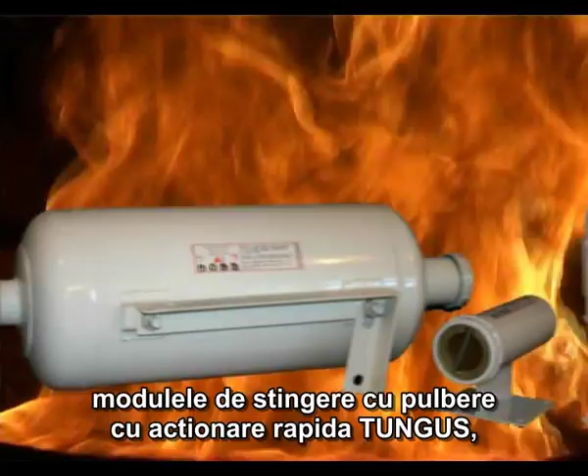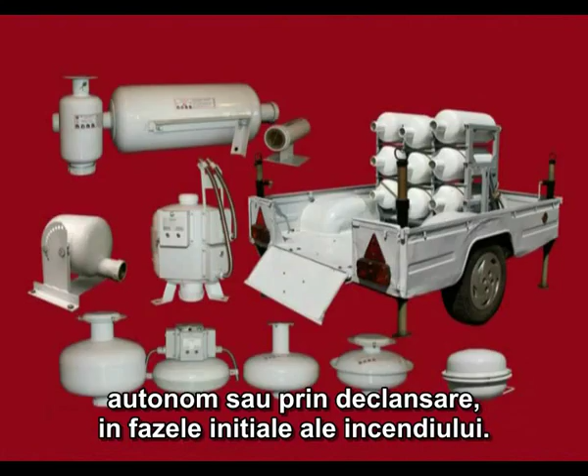To this effect, Источник Plus, closed joint stock company, has designed and developed the serial production on base of defense industry achievements of reasonably priced, efficient, fast-acting powder fire extinguishing modules Tungus, which provide fire extinguishing of the seats of fire arising in automatic, autonomous or self-triggering mode in early stage of fire origin. Such solution makes it possible to avoid large fire damage at minimal costs for modules installation.

The modules Tungus have been highly appraised by the heads of the Ministry for Emergency Situations, Russia, the chiefs of firefighting services in Mongolia, India, China, Italy, CIS countries during demonstration firefighting testings in these countries with Tungus modules usage, the heads of regional branch ministries and industrial enterprises, and a number of Russian governors.

A wide range of impulse, thermal-resistant, fire- and explosion-proof, high-altitude modules are manufactured at the enterprise. They have much higher technical, techno-economic and performance features as compared with Russian and foreign analogs. As to efficiency, the modules exceed several times other types of fire extinguishing means.

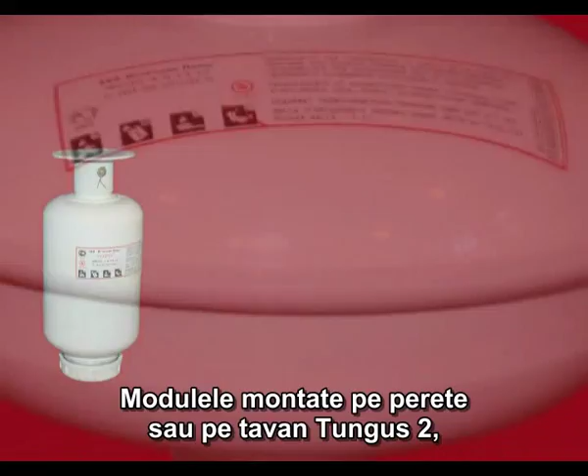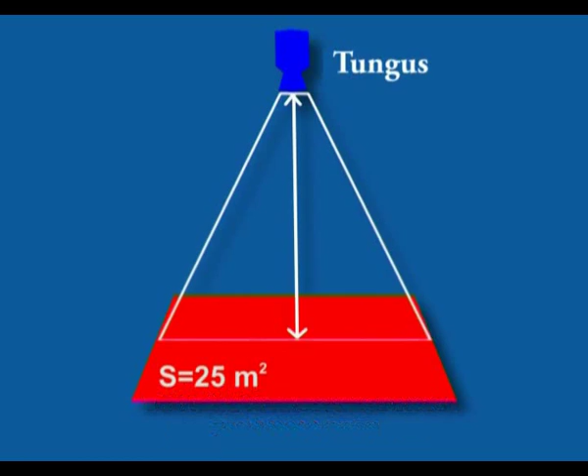The wall and ceiling mounted modules Tungus 2, Tungus 4, Tungus 6 and Tungus 9 are in great demand. They provide fire extinguishing of the seats of fire on square of 25 square meters up to 80 square meters, in volume up to 240 cubic meters, from the height up to 16 meters.

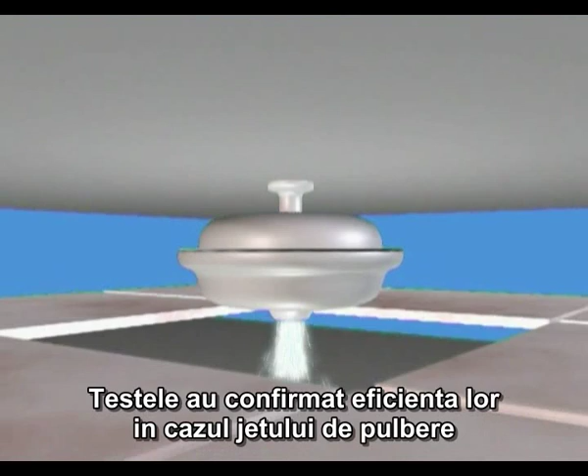Tungus 4 module has the most compact shape that allows placing it behind the hung ceiling. The module tests confirmed its efficiency in case of powder jet perforating the Armstrong type hung ceiling.

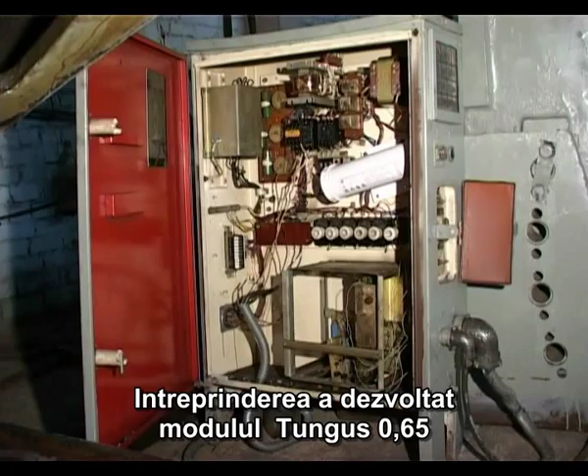The enterprise has specially developed module Tungus 0.65 for extinguishing fires in electric cabinets. It contains only 500 grams of firefighting powder. It is enough to extinguish the fire in the volume of 2.4 cubic meters. The modules Tungus 0.65 and Tungus 2 are capable of operating in any space orientation. The module Tungus 2 is recommended by Mosenergo Project for protecting cable channels difficult of access.

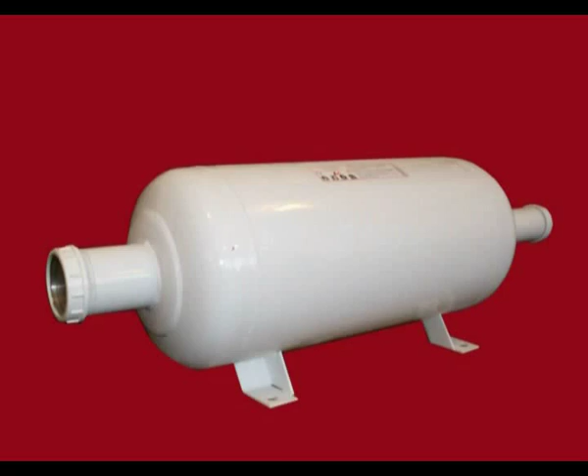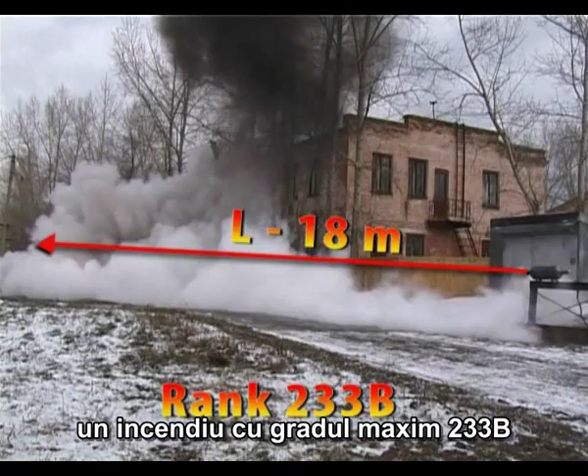The module Tungus 24 provides fire extinguishing at an area up to 75 square meters and in the volume up to 250 cubic meters. Tungus 24 extinguishes in the horizontal state, in the open air, the fires of maximal rank 233B, situated at a distance of 18 meters, and protects cable channels with a cross-section more than 4 square meters at a distance up to 32 meters.

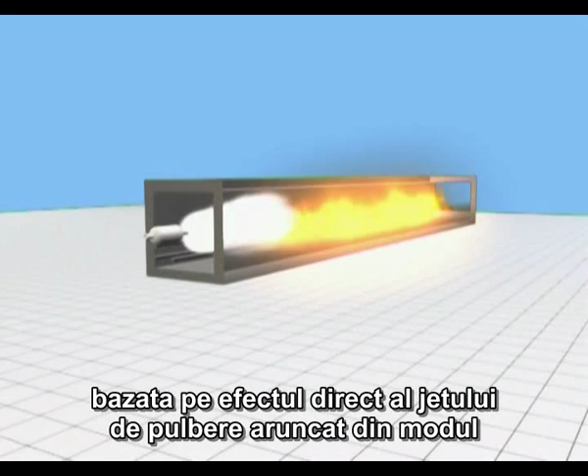Due to fundamentally new method of fire extinguishing, based on the direct effect of the firefighting powder jet flowing out of the module into the seat of fire, its efficiency is far higher than that of the current analogs.

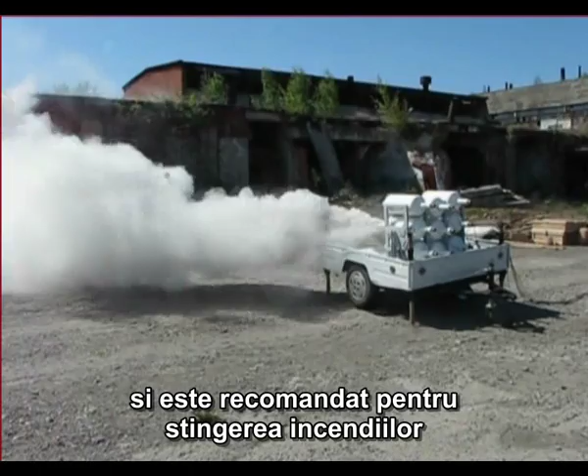On base of Tungus 24, a mobile fire extinguishing set Tunguska placed on a vehicle was designed. It consists of 9 Tungus 24 modules and is recommended for extinguishing of the seats of fire in settlements far from fire stations. The system developed can be mounted on a tractor and a driver can operate it without leaving a cabin.

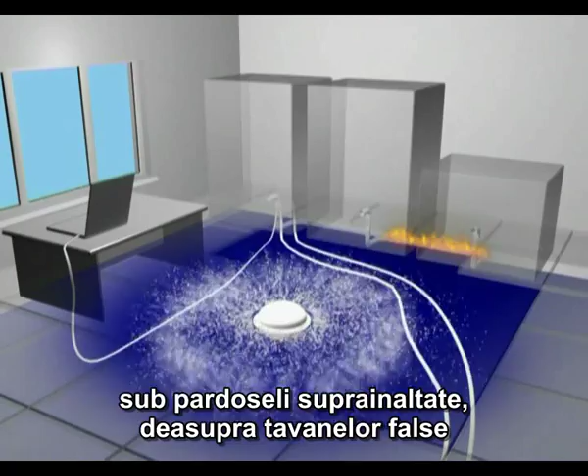Tungus 5 module provides firefighting powder emission through annular slot on lateral surface. The direction of powder emission can be changed by changing module position if necessary. Tungus 5 is recommended for fire protection of cable channels, ventilation valves, space under false floor, behind hung ceiling, and of many other objects with complex geometry.

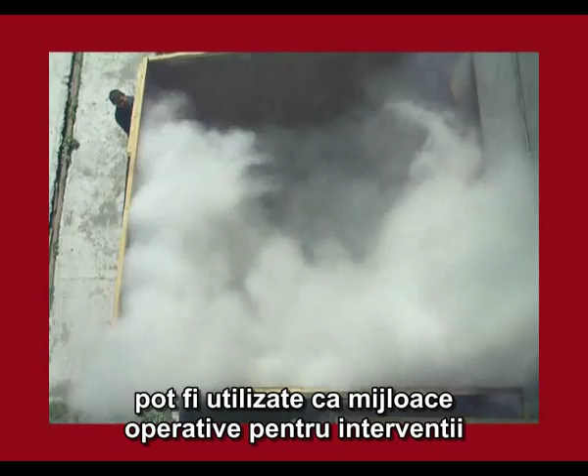The module can also be used as a throwable grenade for fire extinguishing in places difficult of access. Both fire extinguishing set Tunguska, mounted on a vehicle, and Tungus 5 module can be used as the operative firefighting means for objects in areas remote from fire stations and difficult of access.

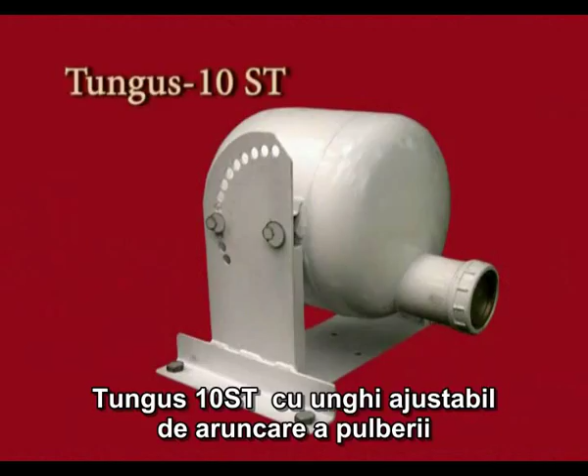Tungus 10 module supplies extinguishing powder upright to 15 meters and extinguishes fire at an area up to 36 square meters and volume up to 216 cubic meters. Tungus 10 ST with changeable angle of powder emission provides extinguishing of the seats of fire on square up to 80 square meters from the height up to 16 meters and from the distance of 14 meters in case of

horizontal powder emission. The development of modules with different direction of extinguishing powder supplying makes it possible to avoid forming shaded areas, difficult of access to the direct effect of a fire extinguishing compound. This increases the reliability of fire extinguishing, extends the operation possibilities of the modules and the field of their application.

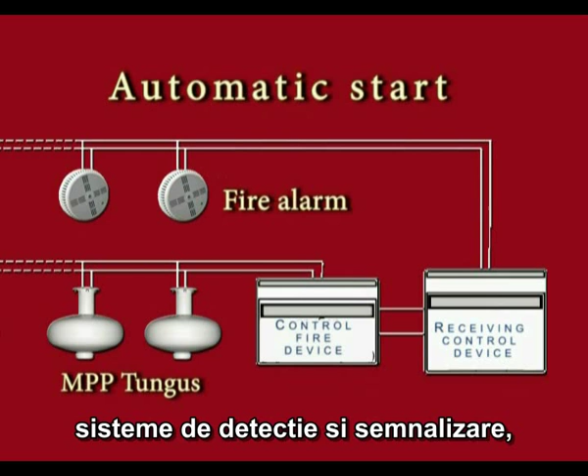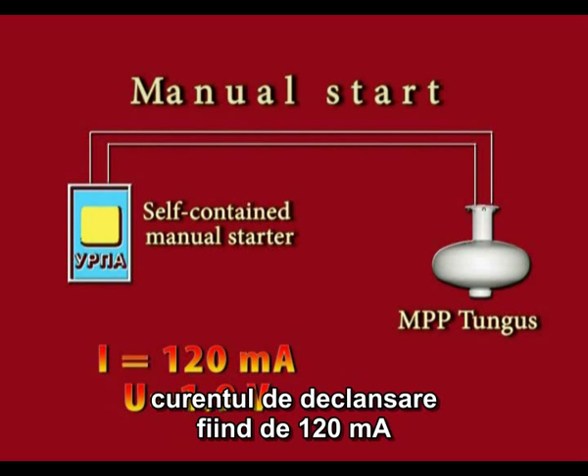The modules are automatically actuated from standard automatics means, fire signaling systems, independently from executive and starting devices, or manually, with electric signal of low power, starting current being 120 mA and starting voltage 1.9 volts. The combined module launching is also possible.

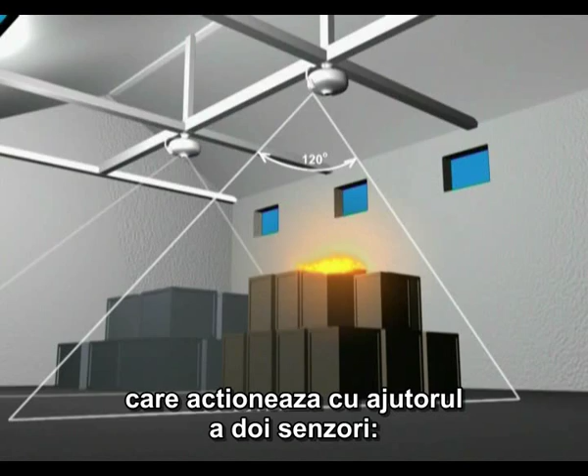All modules developed in kitting with signal and triggering devices USP-AA1 or the 4th version are self-triggering devices which operate with the help of two channels, thermal and optical. Optical channel is activated by thermal channel only after temperature raising, so it makes it possible to exclude false triggering. Self-triggering modules are universal devices and can find application for fire protection of private ownership, buildings, cottages, garages

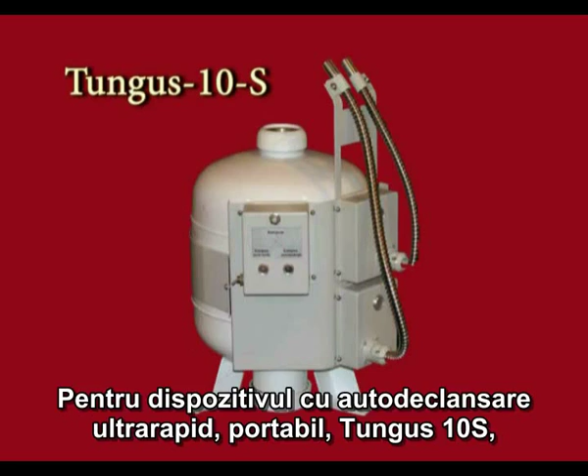and other structures. For self-operating, fast-acting portable Tungus 10S, equipped with detecting and triggering device Pulsar, there's no need to make any installation works. It is enough to place it on the floor and switch the power supply unit built into its design with the help of a tumbler. In case of fire rising, the module itself provides effective fire extinguishing.

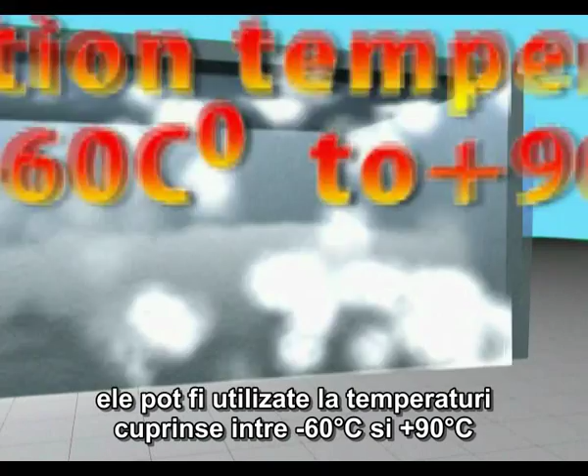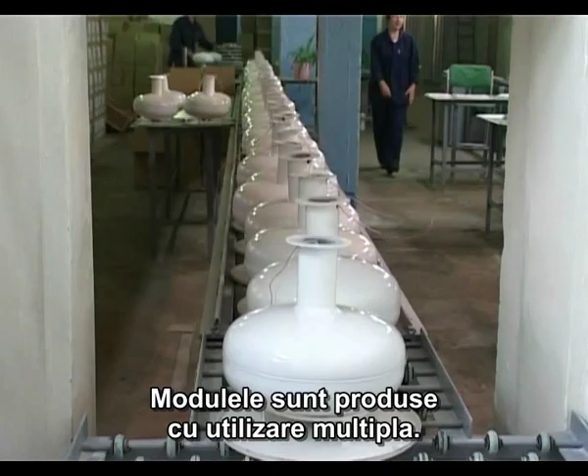The Tungus modules have high performance. In contrast to existing domestic analogs, they can be used within the temperature range of -60 to +90 degrees centigrade for 10 years without any technical maintenance. The modules are products of multiple usage. High technical and operation features of the modules are retained due to usage in their construction of specially developed loading elements.

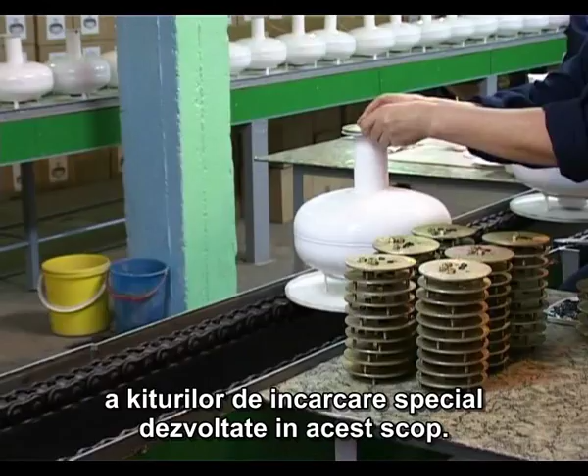The Tungus modules have been certified by fire control authorities in Russia, China, Mongolia, CIS countries. The certification procedure is under process in India. There is the authorization of Rostechnadzor and Russian Railways, open joint stock company, to use the modules at fire and explosion hazard objects, railway transport and in mines. There is a sanitary hygienic resolution confirming environmental safety and possibility of applying the modules at practically any object.

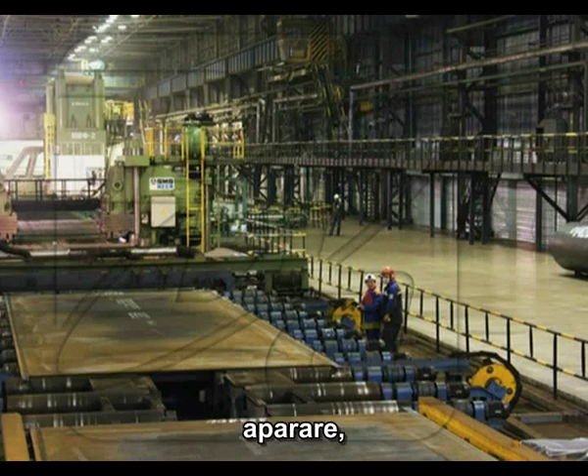The developed modules are widely used on the whole territory of Russia and also in China, Mongolia and CIS for fireproof protection of various purpose objects, including objects of Ministry of Defense, metallurgy industry, power industry, oil refining industry, mining industry, terminals, warehouses, production buildings, painting and drying chambers, oil basements, power equipment and transformer substations, cable structures, garages, petrol and gas stations, libraries, attics and cellars, public buildings and other objects.

The flow line production of fire extinguishing modules with output of 15,000 items per month has been introduced at the enterprise. The production has been certified according to the requirements of International Quality System ISO 9001. The products of Istochnik Plus have been awarded with 15 gold medals of Russian and international fairs and exhibitions.

It has been awarded with gold medal of Gold Mercury National Prize, the diploma of National Prize for strengthening of the safety of Russia, and has been appreciated as the best industrial enterprise of Altai region for the last 4 years.